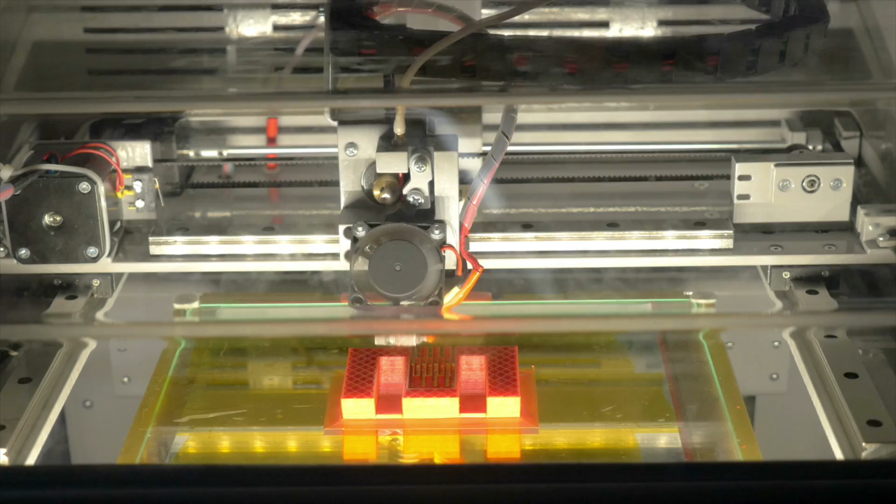To do that, as recommended in that Switch and Lever video, I was going to have Shapeways.com print it for me, 3D print it. They can print in a whole variety of materials, lots of which are plastic, which of course for a branding iron isn't going to do you any good. But they can print in stainless steel, which is the route I went.

To be able to get something 3D printed, you need to be able to supply a file that shows the part you want to have built in 3D. There are a lot of programs out there that can do this.

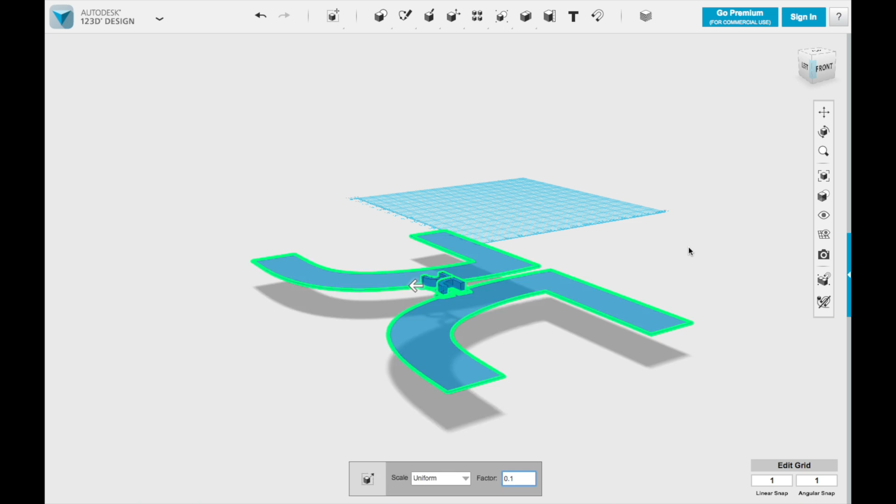The one I went with is called 123D Design, made by Autodesk. From some of the things I've read, it kind of sounds like Autodesk is phasing out this program, but it worked fairly well for what I needed.

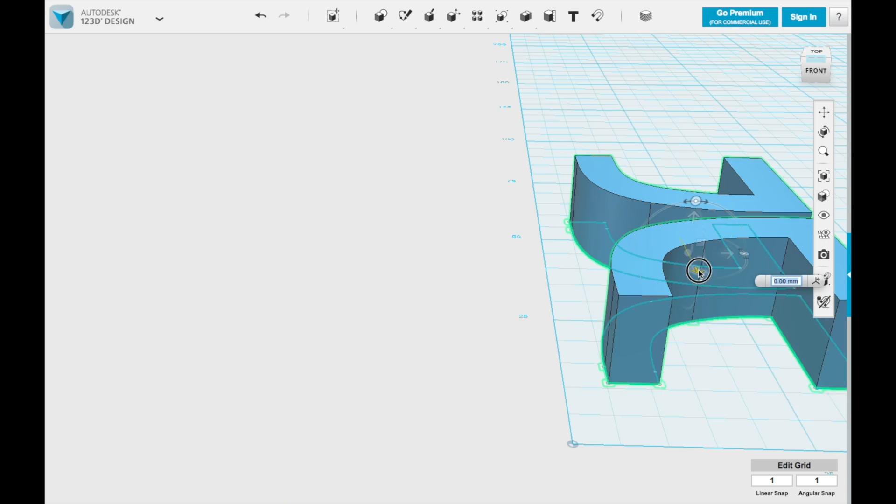It was a little confusing at first, but I did find that Shapeways offers tutorials on YouTube for free for this program, and I'll provide a link to those in the description as well.

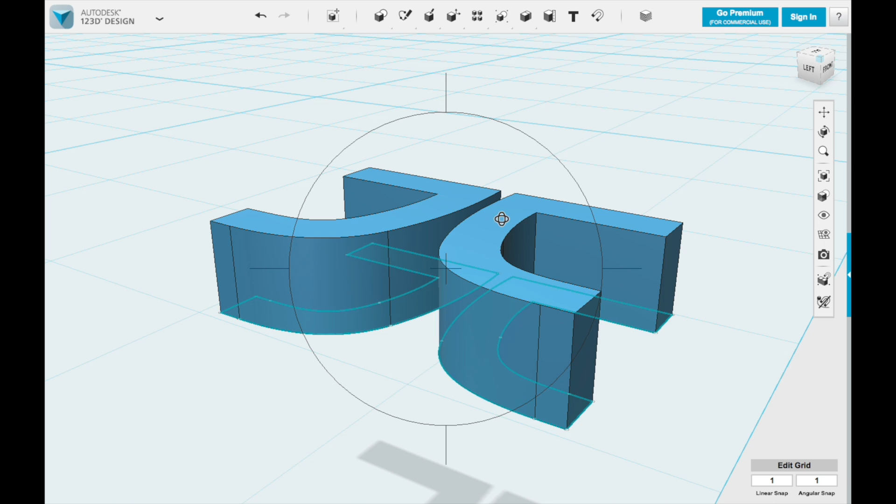So after watching those tutorials, I opened a new project and imported the file that I had created in Adobe Illustrator. I had to adjust the scale and figure out the depth I wanted the letters to be, then I needed to create a round surface to join those two, which would essentially be the main body of the stamp.

And I went for about a 1-inch diameter on that round circular portion and made it about 1/8 of an inch thick.

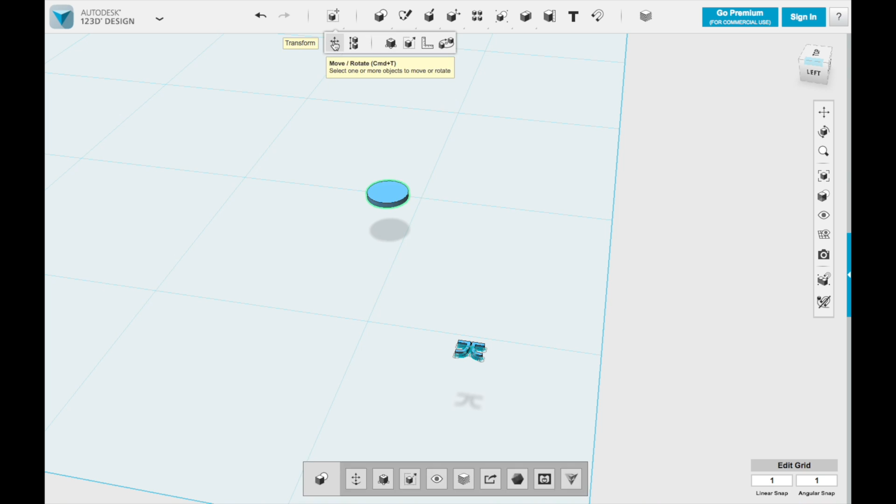In the center of that, I made a cylinder that was about 1/4 of an inch in diameter and about 1/2 an inch long. In retrospect, I should have gone just a hair under 1/4 of an inch and made that cylinder a little bit longer, just to make it easier to add threads to it.

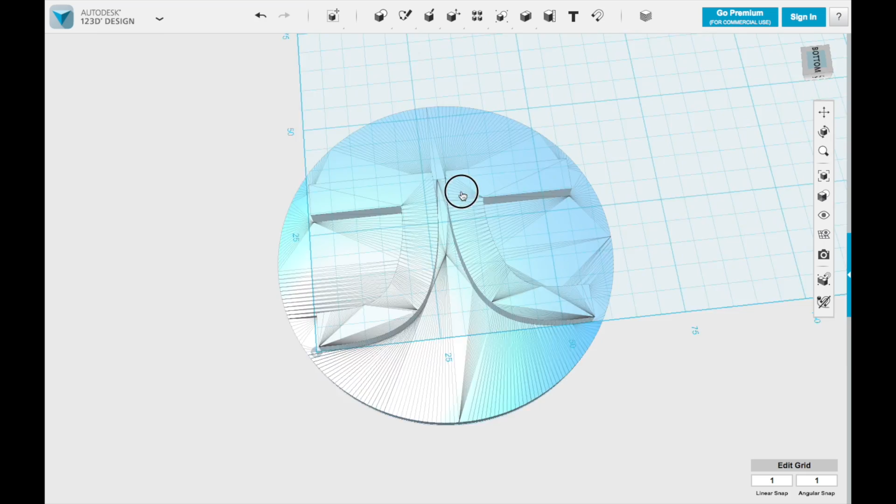My plan was to thread this for 1/4-20 thread, but when the stamp was delivered, that cylinder was just a hair too thick. Once I had all these shapes in there and joined together, I saved that file and exported it.

I created an account on Shapeways.com and uploaded the file. When you do this, you want to make sure that you double check the scale. It'll give you a projected size of what it thinks it's going to end up as. And the price varies considerably depending on how large of an item you're having printed, especially in stainless steel. It ended up being about $18 to get this one piece printed.

Once you pay for your part and have that all submitted, then you wait. For mine, it took about 2.5 weeks after I submitted what I wanted until I received it in the mail. And this is what I ended up with.

It turned out pretty good, I thought, except the face of the letters was just a little bit rough, so I went through several grits of sandpaper and smoothed that out. I'm not sure that it would have really made a difference had I not smoothed it out.

I just wanted to make sure it was as crisp as I could get it, so that once I apply heat and try to mark a project, I want those letters to be as crisp as I can get them. I was worried that the roughness on the face and along the edges might soften the edges and add a little texture to the faces that I didn't want. In the end, it turned out nice and shiny.